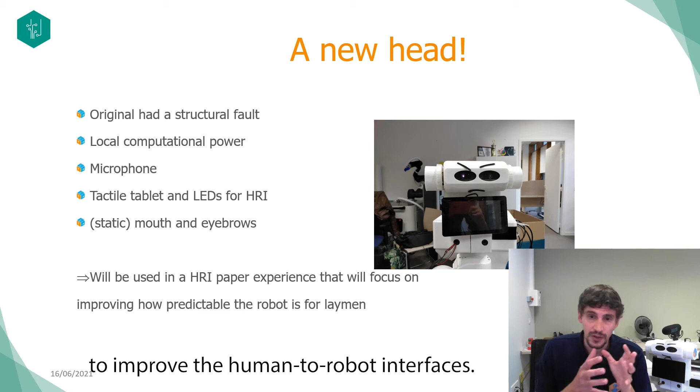So we added a few things: a microphone, a local computational power, which is a fancy way of saying we added a Raspberry Pi with some custom things on it, and a tactile screen. Also, we added RGB LEDs, and this is probably the most important thing because these changes were mainly motivated by our will to improve the human to robot interfaces.

Actually, this was going to be used in a paper that focused on improving how predictable the robot is for laymen. Unfortunately, COVID happened, and then any kind of experience with actual people just got postponed. So I don't have any research results to show you guys, but hopefully that will happen.

Lastly, the mouth and eyebrows are mostly for fun, but it's interesting how easy it is to make it change the emotion by just tweaking a little bit, right? In this picture, it's clearly angry, and here he has a bit of a smug face, right? Maybe someday we could just motorize them and make an emotion-based task in RoboCup. I don't know.

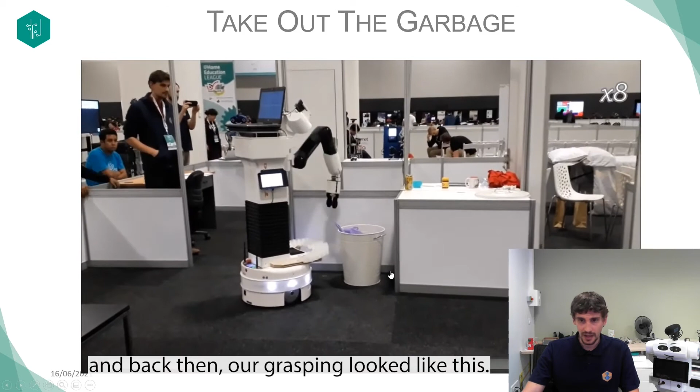The second thing I wanted to discuss here is the grasping capabilities. So our first competition was in 2019, and back then our grasping looked like this. The fingers were just rigid and had no sensing, and we used mainly the force and torque sensor in the wrist to make things a little bit more robust.

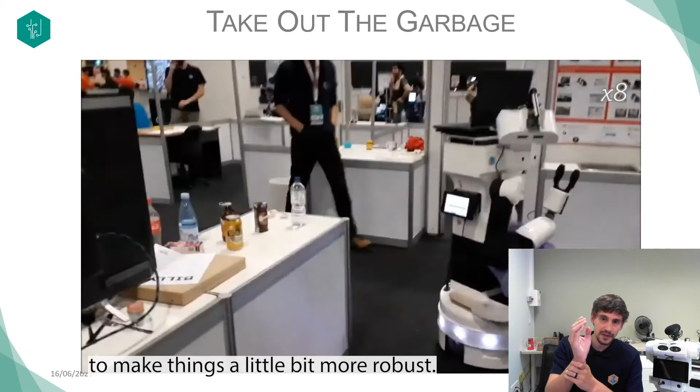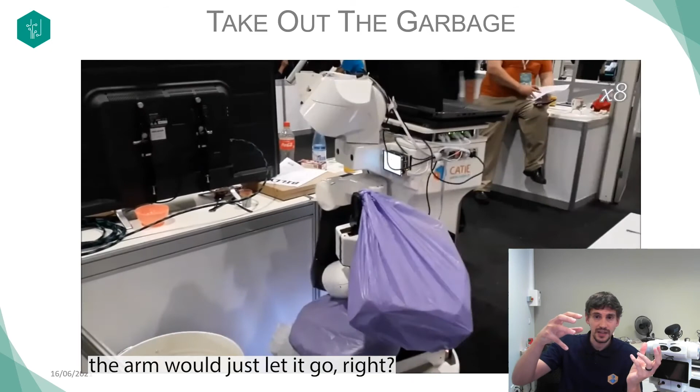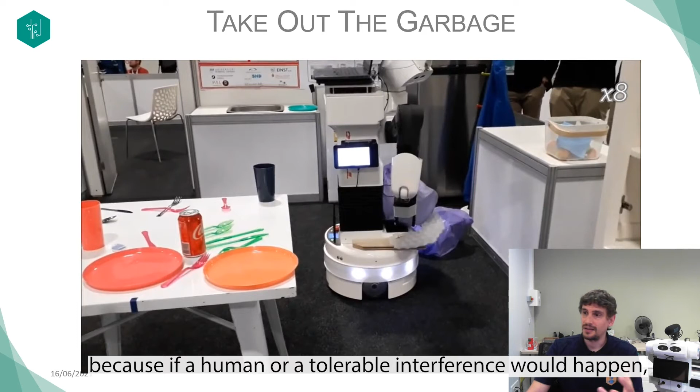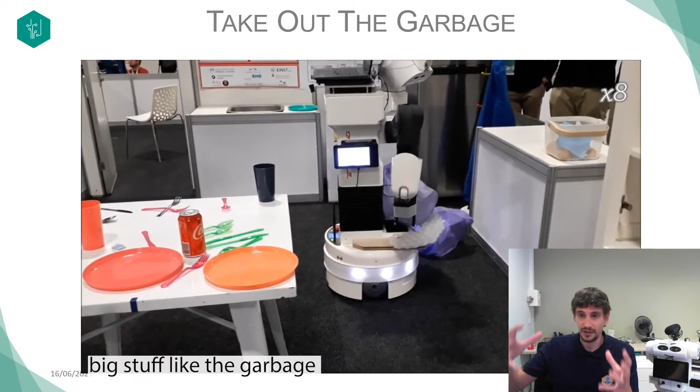So what we did is that if the sensor felt that a force was abnormal, the arm would just let it go, right? Instead of forcing against it, we'll just let it go. So in a way that made our movements more robust, because if a human or a tolerable interference would happen, the arm will just adapt and then do it again. This was very useful when we were grasping big stuff like the garbage, right?

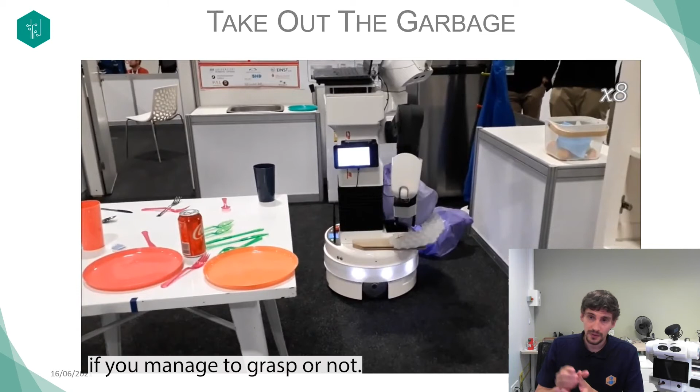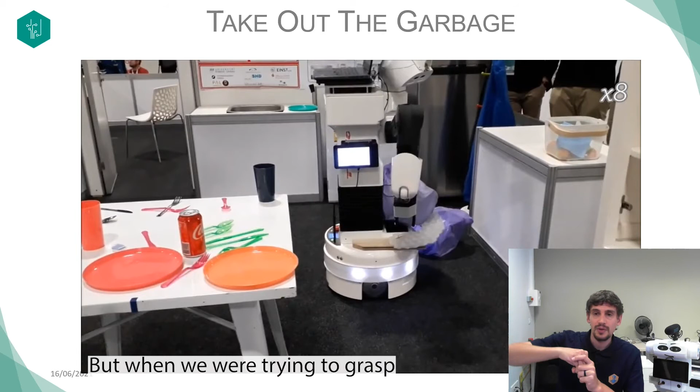But it wasn't enough when we tried to go for more complicated graspings. In some cases, you really need to know if you managed to grasp or not. In this case, the bag was heavy enough that we could just take it up and make sure it weighed, right? But when we're trying to grasp small things, we need, one, to know if you grasped it, and two, maybe find a way of increasing the accuracy of the arm movement. So to do that, we made new fingers.

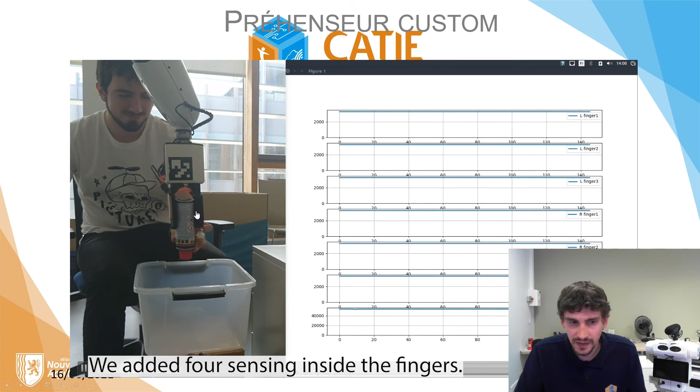So the first version of the fingers looked like this. The second version of the fingers looked like that. And the final version looked like this. So how does it work? We added force sensing inside the fingers, more like pressure sensing, but kind of the same. And this way we know if we have something inside the gripper, because you can't just rely on is it closed or not, because sometimes you will just pressure something that can be crushed, right?

In this example, we show that we can grasp fragile items without breaking them. The other modification we made is that we added a suction cup to grasp items that are otherwise very difficult or almost impossible to grasp. For example, in the RoboCup at Home, it would be a plate, and in this case, a sticker.